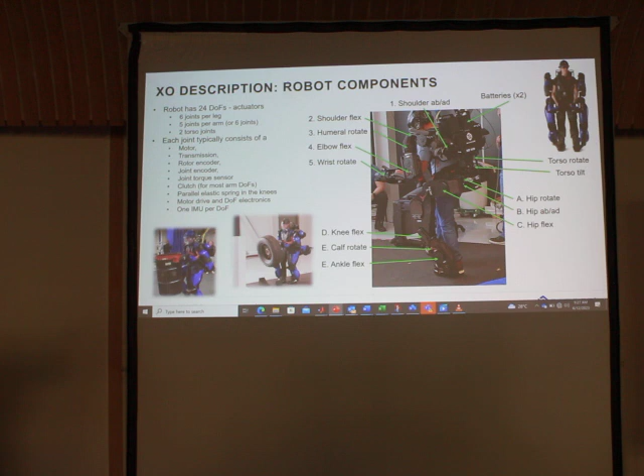Seamless in operation. We have a bunch of sensors, which we developed in house because you cannot find COTS devices. Even if you find COTS devices, they end up being very expensive for 24 joints, times motor controllers, times sensors like a load cell, which doesn't actually exist in the industry. So there's a lot of internal development in putting this into production mode.

Some basics: we have 6 load cells, force moment sensors, 2 on the feet, 2 on the pelvis and torso, and 2 in the hands. So how you engage with the robot is really projecting your reflection, or force moment reflection, to what you ask your robot to do.

So sometimes when you're lifting a heavy load, you apply more pressure on that sensor that's sitting on the hands, which is actually transformed back into the Jacobians, back into the commanded torque that goes into the joints.

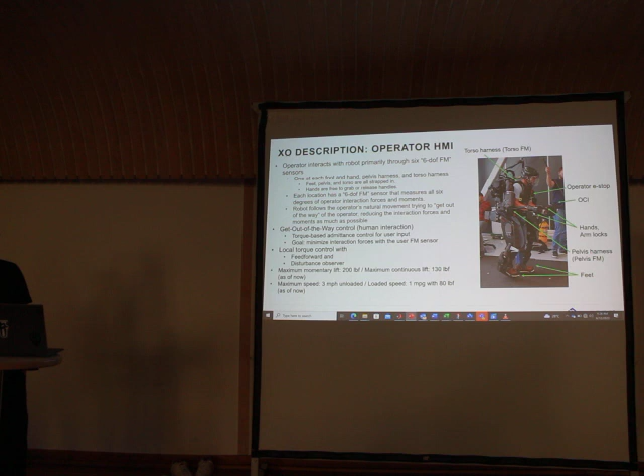So that's kind of low level. Middle level is probably what would be most interesting, but if you don't solve the problem at the low level, you run into issues where you cannot execute what you're commanding for middle level or high level. So having this low-level controller solved, to compensate all the nonlinearities while still being relatively linear and easy to implement on hardware, was a key component.

Some of the basic stuff that we patented a long time ago is what we call get-out-of-way control, which is basically: I want to achieve 0 force and 0 moment applied to the human. That's my goal, and how do I do this? Through the Jacobian transpose of the end effector, you can go back into the basic principle to command the torque that will allow you to sustain the weight of the robot, compensate for gravity as well as the payload, and actually achieve that fluentness in motion.

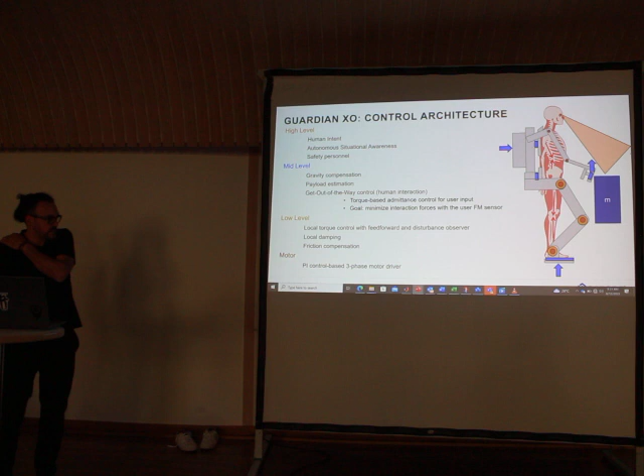So the key part of high level is really that human intent. Each user projects forces differently. A more experienced one is very easy with the machine. A less experienced one is almost afraid of the machine itself because you're bearing this thing. Like first time driving, you have a tendency to hold the wheel really hard, projecting unnecessary force and moment on the wheel. The same happens when you first step in there. You feel nervous, pushing forces and moments harder, which translates into pumping more torque, which is unnecessary.

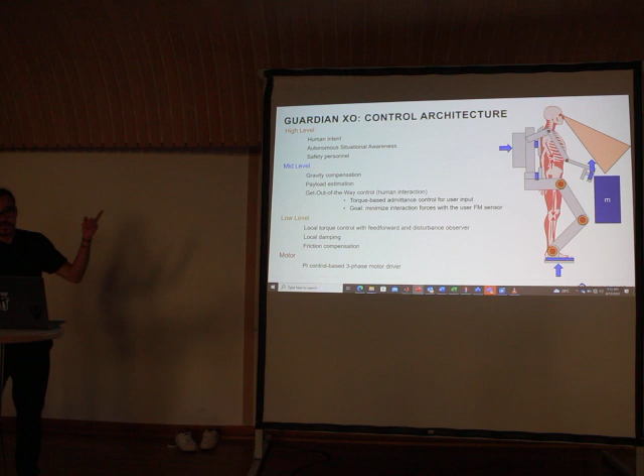One aspect of really understanding human intent is through measurement of those forces and moments coming from 6 places. We did a bunch of work in probabilistic machine learning and some level of reasoning, because it's very hard to model human intent. So can we actually learn that transition from the data we collect? That allows us to be agnostic to users, so you don't have to retune your controllers depending on who steps in there.

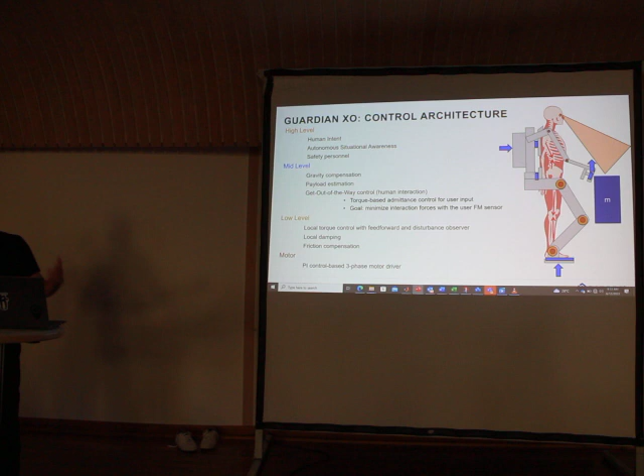That saves time and becomes more agnostic to the people who operate it. It also improves safety. Safety in an exoskeleton is an issue, but you can address it mechanically with protection, though then it becomes a silly machine, and you don't want to wear a cage around yourself walking this thing.

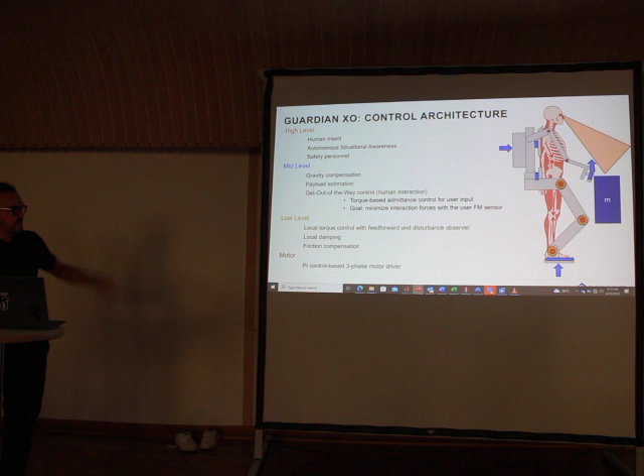But you can also solve this with controls and better sensors. So as a result, we went through these basic controls, then also established optimization-based control, which is a hierarchical task-based controller that works simultaneously with traditional controls. We can prioritize tasks—for example, balancing is a key moment. The other one is contact with your feet that has to be ensured, and then all other tasks become secondary, because doing something with hands is easier to prioritize or schedule than guaranteeing balancing and contact.

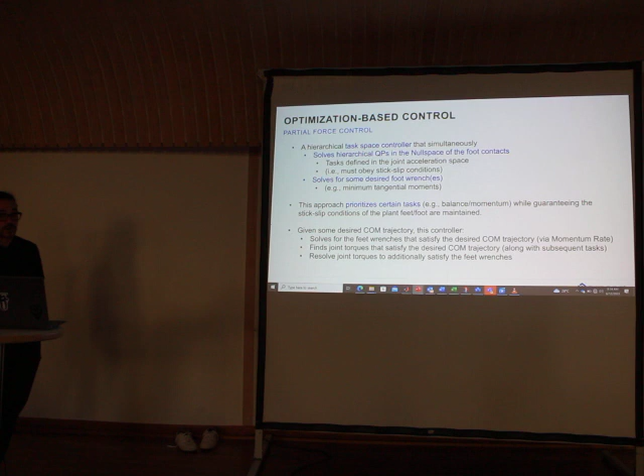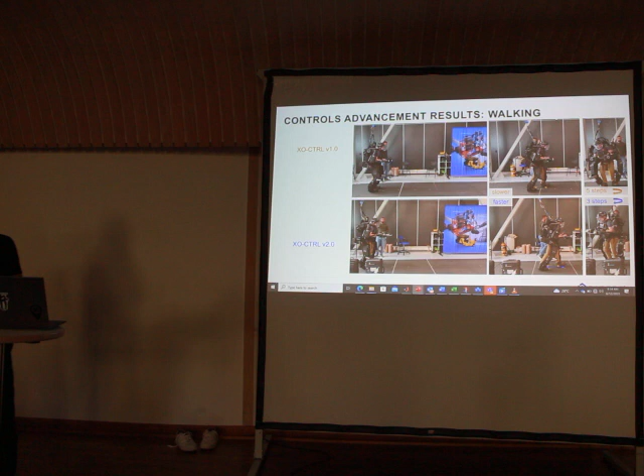So the combination of traditional controls and optimization-based controls gave us significant improvement compared to the original exoskeleton. I'm going to play a few videos because I think pictures say much more than my words. That's kind of how it looks like—it's a little bit awkward to walk. You still execute what you need to do, but slower.

Turning is especially key here—it happens in 5 steps, for example. This is off tether, but because of safety in the office we have to have a gantry. Now if you do the same motion with this combination of optimization-based controllers and traditional ones, the motion is much more fluid, and especially turning around happens in 3 steps, which is pretty good for a novel user in this case.

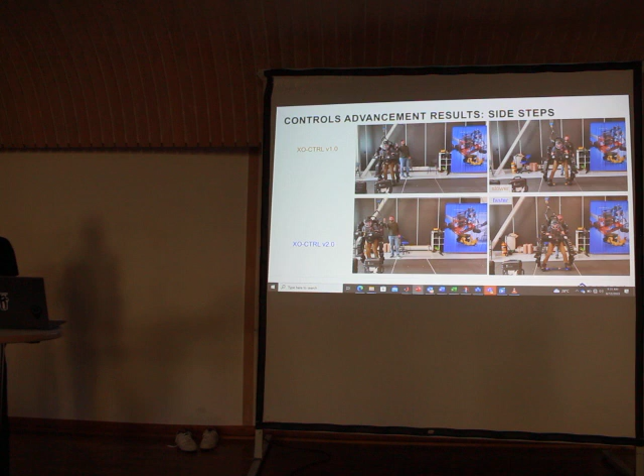We do evaluation of quantitative metrics. Gait, human gait, is very important. We can also measure muscles and EMGs, which gives us an indication of how well we're doing in controls. Because if you're straining your muscle, but perhaps walking smoother, that doesn't play well—somebody's going to get injured carrying this sort of load.

This is another important test, side steps. Again you see it's a little bit not as fluid as we'd like. And with the new control techniques, this is what happens if I had to go down here.

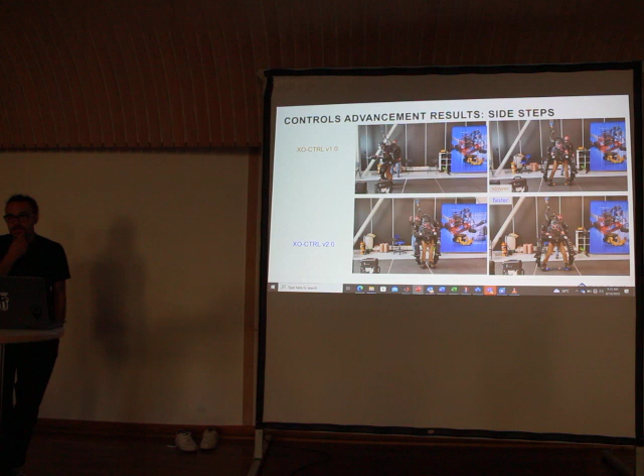So all of this is running on hardware that actually exists on the back of the exoskeleton. It's an x86 processor, and we also use NVIDIA Orin to complement those functions. Everything is running on constrained hardware, not off a separate computer.

And then if you do this with a load, you see fluency as well. This is an 80-pound suitcase, which feels about, I think, 8 pounds that you're carrying—a significant reduction in what you feel in the robot itself. In this case, 7 steps for turning.

This is critical in the apron application, the tarmac of the airport. Turning around, putting the bags down, is a really critical operation. If you can do this smoother, that's key, because it also looks safer. So you can see that smoothness of motion in this case.

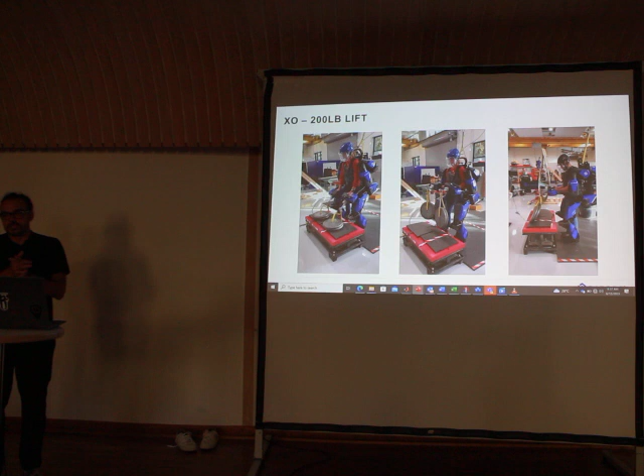It's fun actually being in the suit. I did it like 3 years ago, and the first time I noticed backlash, friction - it's like, get rid of this stuff because you can improve a bunch of things. I just recently stepped in with the new controllers, and I felt like you can really start running. Not that you want to run, but in any case, this is practical implementation of something we theoretically implement and play with - it's how we're taking this research and development and putting it into commercial use, which I think is a neat example.

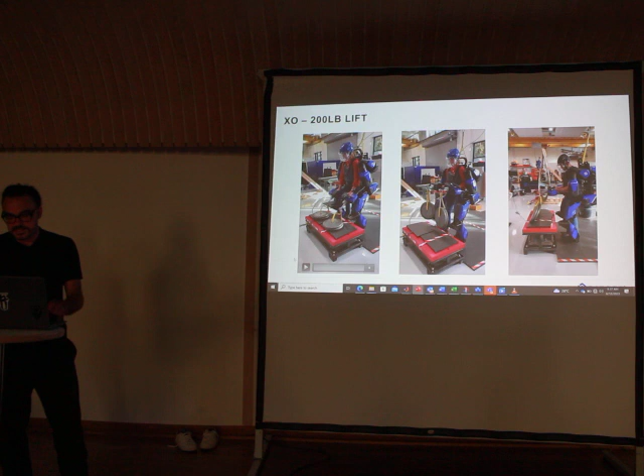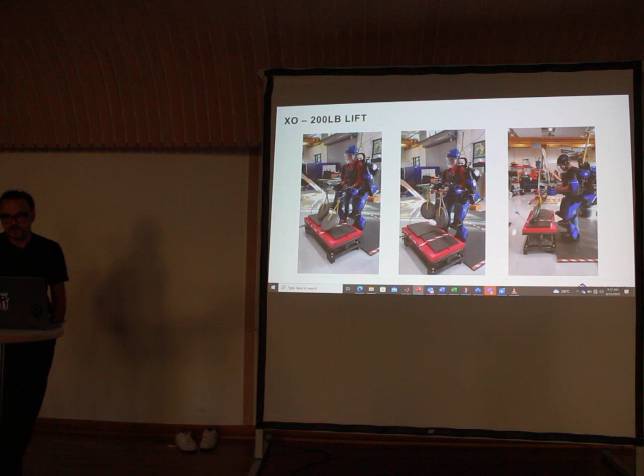I don't know about the lifting of 200 pounds, which is really neat - I think that's probably the heaviest load that any exoskeleton or humanoid can lift. It's not that you can lift that continuously before the motors start to overheat, but some instantaneous motion of 200 pounds is required, especially if you're pushing - that's even more desirable. All these use cases come really from the customers we face, or investors, including big companies like Caterpillar, which use heavy tools to manipulate things on factory floors.

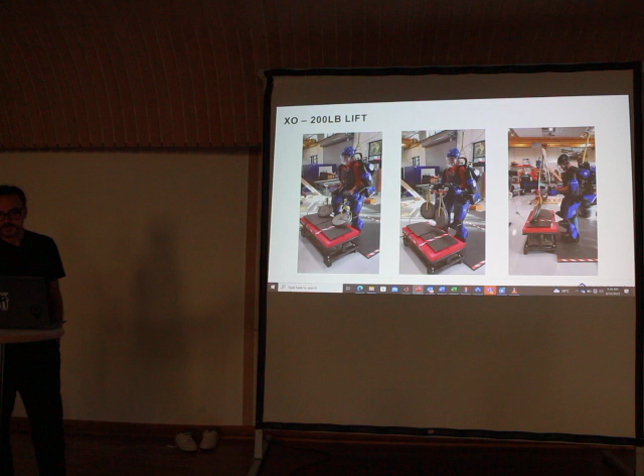Okay, so maybe now to the more interesting side. The reason I mentioned replacing a battery is also hazardous environments - can we do this in an autonomous way? So going back, this is balancing under disturbances - again, this combination of optimization-based control, task prioritization, pretty robust off the tether.

The one video I cannot play on my machine because it's on Apple is this - now you have task prioritization, you're still balancing yourself while handling load. In this case, we're just playing around, juggling these two 40-pound loads. But it's actually pretty impressive how the momentum controller is changing the center of gravity to compensate, establishing balance and keeping the feet on the ground.

What we are currently working on, I think the key is to continue making movement or steps with the robot. The things that work in simulation are great in simulation, but right now we are working with Aaron's lab and a few other universities to help speed up some of the development. Theoretically it should be working, but we are not there yet.

So let me just quickly switch - this is actually also neat for implementation. We do a lot of teleoperation because teleoperation can actually quickly get you where you need to do what you need to do in manipulation. No pre-programming - you can get there much quicker with teleoperation in execution of certain tasks.

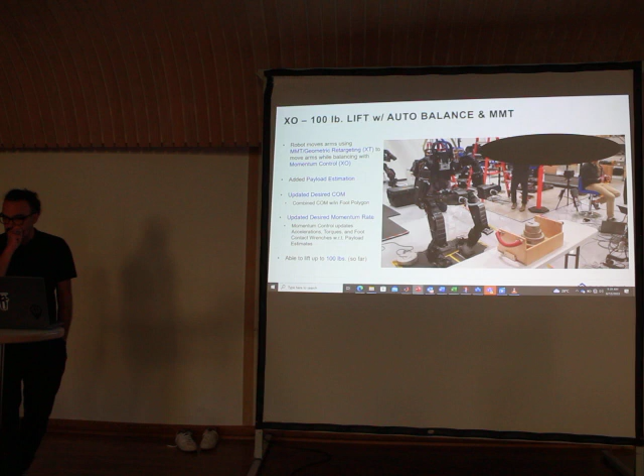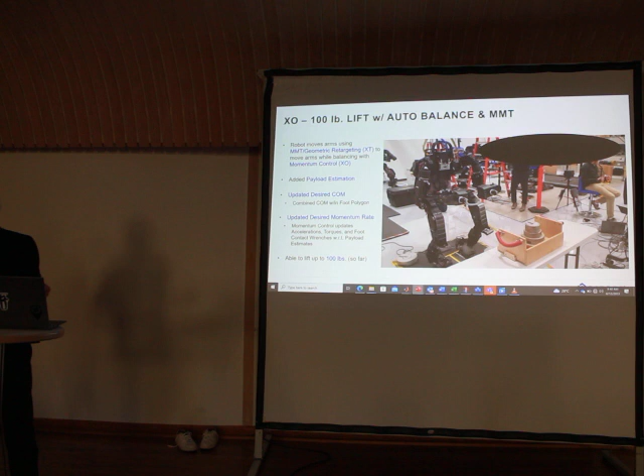So we build what's called a magnetic motion tracker that either tracks your controls in task space, or you can also do it in joint space. We do geometric retargeting to avoid self-collision with the arms and torso, and then in this case, it's running while the optimization-based controller is stabilizing things.

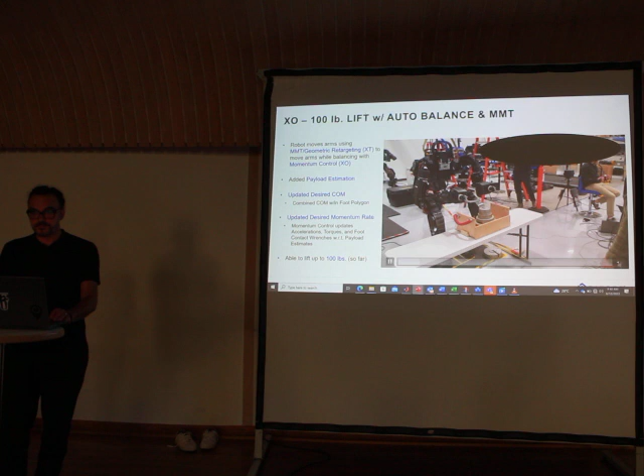The teleoperation by Eric here is used to handle this load - this is a 100 pound load, which for our applications the humanoid needs to handle at least that much, because that's what the industry requires - not handling empty boxes or light objects, but something actually meaningful.

Because I'm running out of time, I'm not going to play this video.

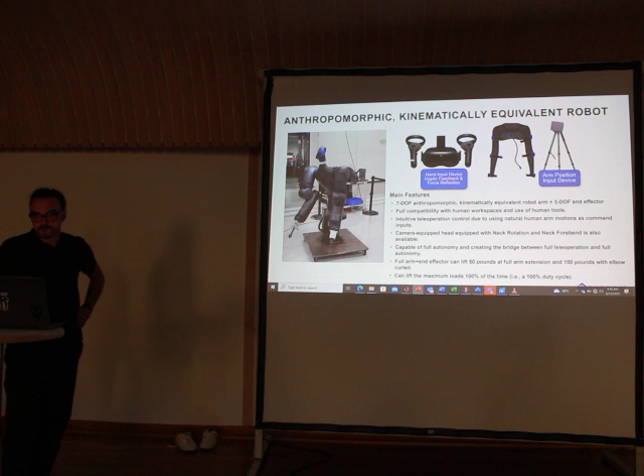I want to give you some indication of the new robot that we just finished, which is also going to production - this 16 degrees of freedom anthropomorphic robot, and you can actually do quite a bit of kinematically equivalent tasks. This is sort of silly, but actually this task on the right is really what you would need to do in hazardous environments.

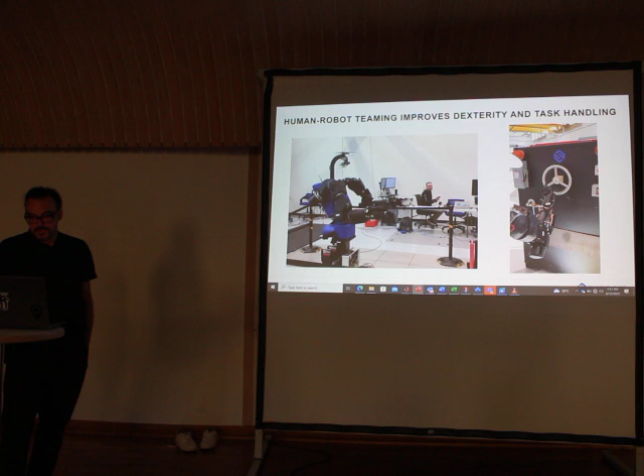Yeah, so you can still make an exoskeleton as long as you attach the load cells on the bottom. But in this case, we decided to take the human completely out, because the application was repairing power lines. You don't want to have a human there, that's the whole purpose.

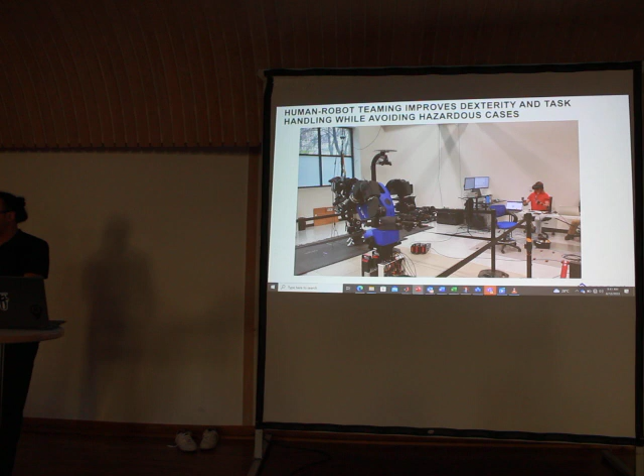That dexterity gives you full human-like motion, 7 degrees of freedom kinematically. So now you can teach the robot to repair tasks and put in the load controls. It can handle about 100 pounds. There's a set of cameras on top, so you can use that for autonomy or to send information back to the teleoperator who's wearing the goggles.

Okay, I don't have anything else. I think I may be on time - a little bit over, but well, thank you. Any questions?

Yes, so it's optimization-based, prioritized control. Right now we set up strict prioritization: stabilize first, then do the contact constraint, then do something else. So it will just ignore the lower priority tasks entirely.

So does that mean you haven't noticed switching issues going from constraints satisfied to not quite satisfied - any jerky behavior in the control? Because we combined it with our previous version, which we call get-out-of-the-way - you want to always apply zero force in the hands, zero moments to the human. So that controller is already smoothing the transition between optimization controllers. It runs at a high frequency rate because we can't get the optimization-based to run more than 350 Hertz, which is still good for that constrained hardware. But our overall controls work at 1000 Hertz, so that switching is compensated for by the controller running higher.

Similar question - what are you doing with human intent? Is it a finite state machine, or are you setting trajectories for reference points? The intent is captured through the gait - you can predict the gait of the user across many users, capturing that intent properly using probabilistic models based on HMMs or HSMMs, since we have a bunch of training data going on.